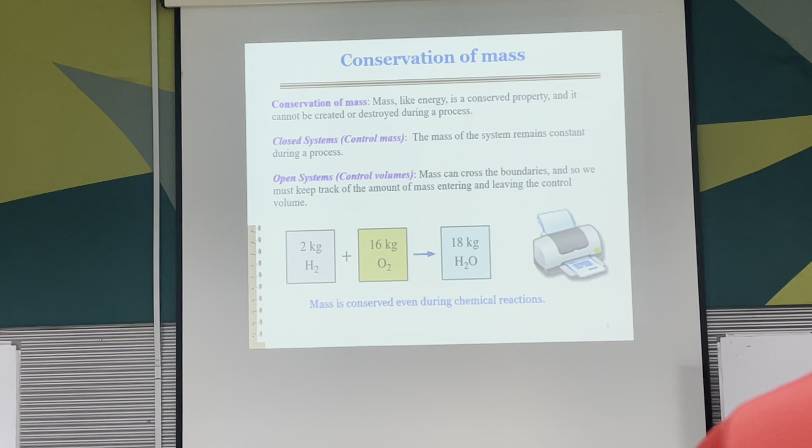And yeah, so in open system, conservation of mass is a theory that is very important for us. But in general, of course, that's just what we assume most of the time lah. Okay, so in both cases, closed system, open system, for us, we just assume the mass is always constant. Okay, so we talk about conservation of mass. So we are talking about mass flow rate in equals mass flow rate out. So we always assume steady flow, and then we can use this concept for open system.

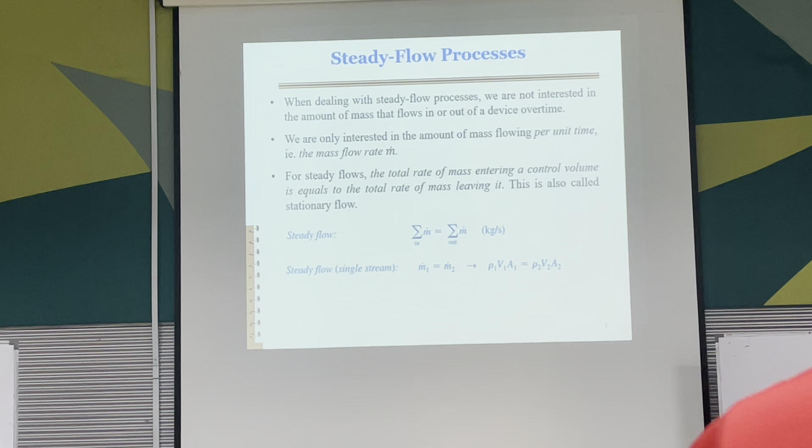Okay, so yeah, steady flow. As I mentioned, we use the assumption of steady flow in order for us to be able to assume conservation of mass flow rate. So this is one main assumption that you must have for all open systems. Okay, and then this is just how we calculate mass flow rate from volume flow rate, and also how we calculate volumetric flow rate. So volumetric flow rate is just the velocity, so this V here is velocity, multiplied by area,

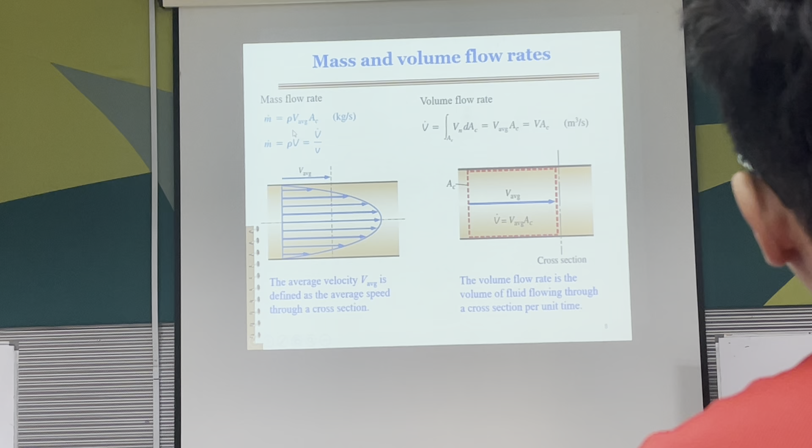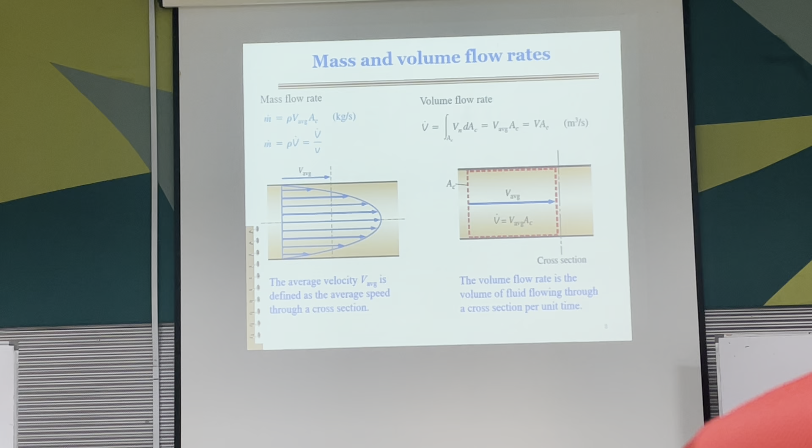and then mass flow rate is simply either density multiplied by volume flow rate or volume flow rate divided by specific volume. So again, these are the things that must be intuitive to you lah. The moment you see this, you must know how to do all this. Okay, so I think we did look at this example where it's just a calculation of mass flow rate, so nothing special here.

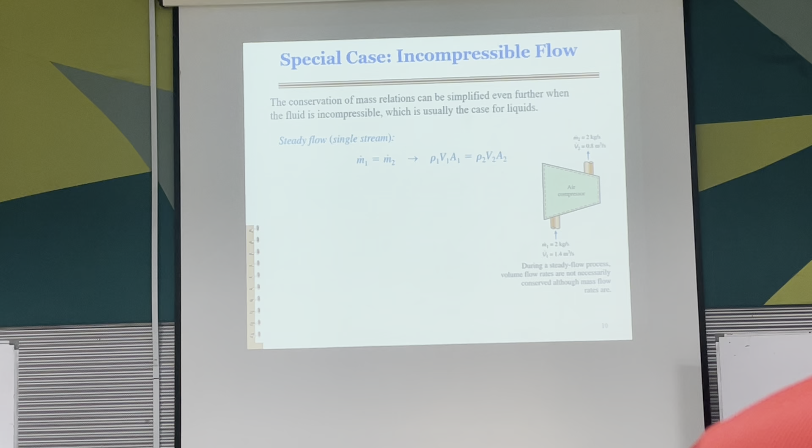And then we talk about this special case of incompressible flow. So incompressible flow means that the fluid in play here, whether it's liquid or gas, has a constant density. So the density or specific volume doesn't change. So in this kind of case, you can assume that the volume flow rate in is equal to volume flow rate out, because the density is a constant. But always remember that we don't have such a thing as conservation of volume. It is always conservation of mass. So in all cases, just assume mass flow rate is constant.

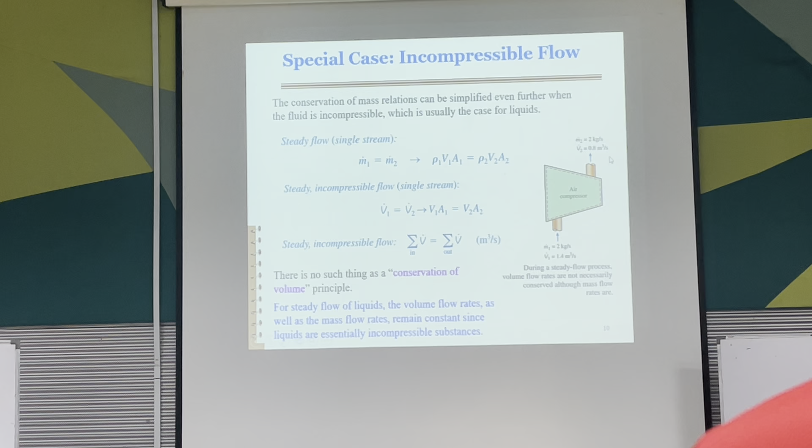Okay, I mean, if you're not very good at differentiating the situation, then you just cancel off accordingly. But again, mass flow rate is always constant, not volume flow rate, because the density can change. So you can see in this example as well. It's just a simple illustration, but you can see that the mass flow rate in and out are both 2 kg per second, but the volume flow rate can change. So the variables that can change here would be velocity, area, or density. So these are the things that might change.

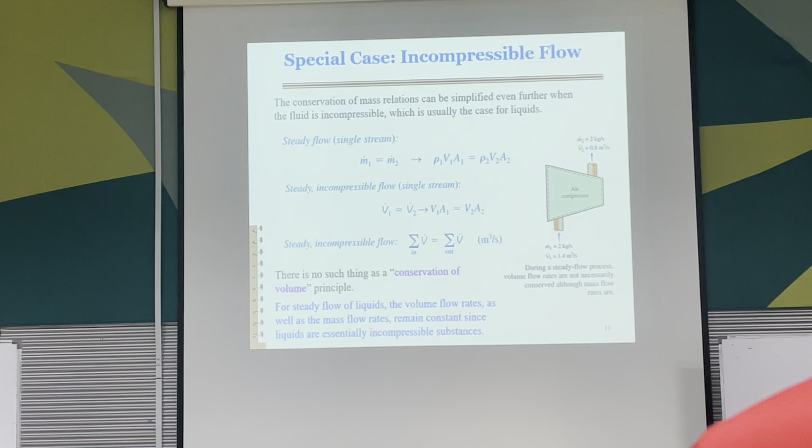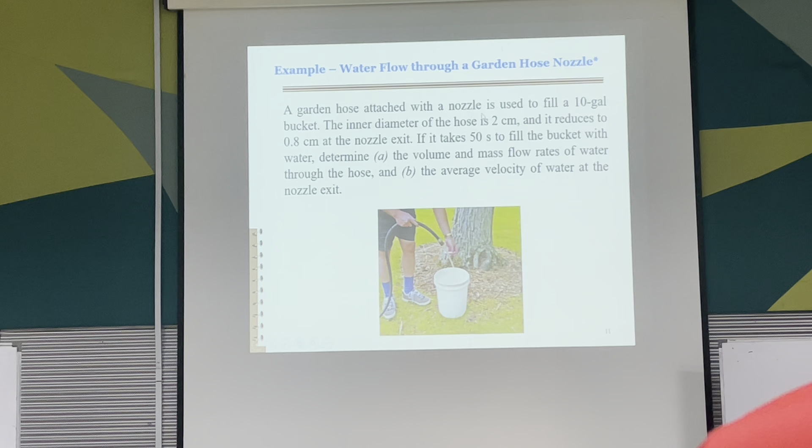Okay, then we do have one example here. A garden hose attached with a nozzle is used to fill a 10-gallon bucket. The inner diameter of the hose is 2 cm, and it reduces to 0.8 cm at the nozzle exit. So the normal hose that you use at home is an example of a nozzle as well, if you have the attachment at the exit. If it takes 50 seconds to fill the bucket with water, determine the volume and mass flow rate of water through the hose and the average velocity of water at the nozzle exit.

So try this out based on what you have just learned. This will be about the conservation of mass, so mass flow rate. Just a quick one. It shouldn't take too much time.

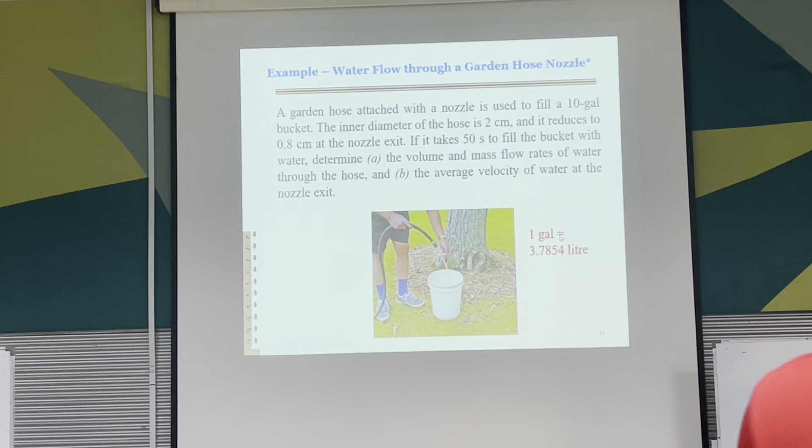You can use this conversion for gallon, and in this case, when you're dealing with liquid water, we can more or less assume that the density is constant.

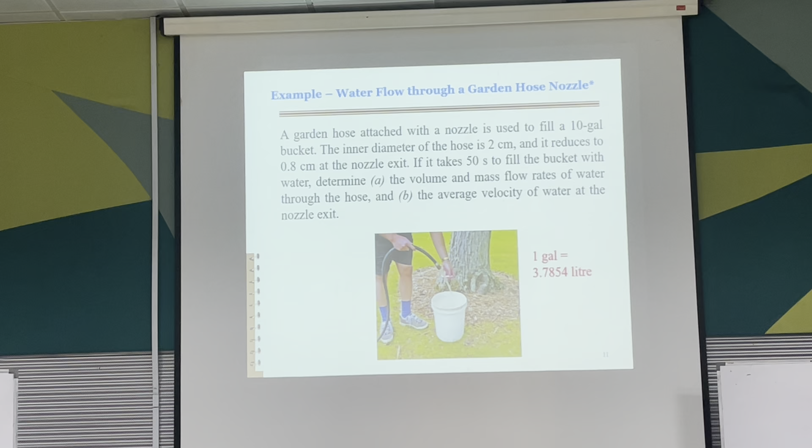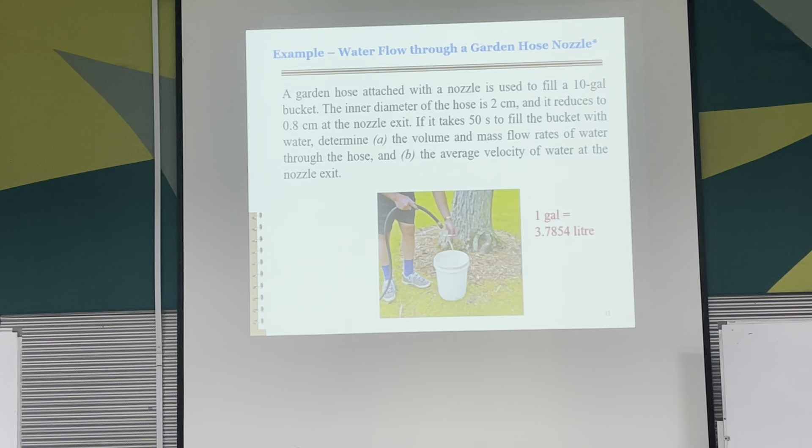Okay, I think I'll just show the answer for this one. So again, let's just look at the question. You are told that the inner diameter is 2 cm and the exit would be 0.8 cm. So that's what you have lah. If you have a nozzle, then this will be the 2 cm part, and this will be the 0.8 cm diameter. And you have the total time to fill the bucket. Essentially, that's all you have.

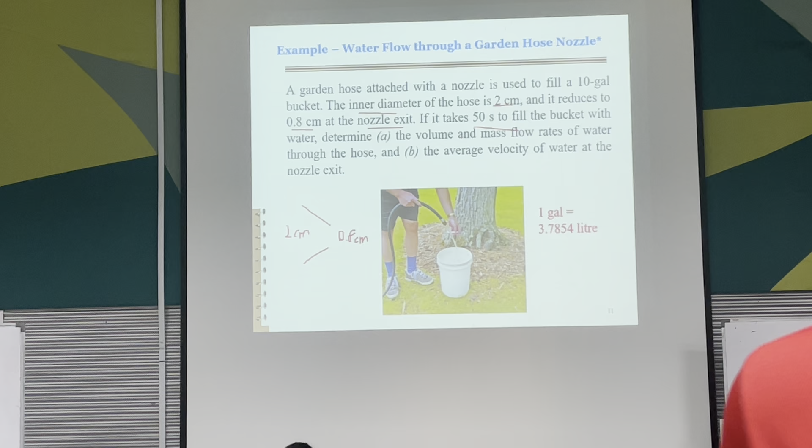But of course, like I said, if we are dealing with liquid water, we can mostly assume that this is an incompressible flow, because if you just look at the thermodynamic properties table, for water, on the saturated liquid side, you can see that the specific volume doesn't really change much. They're all quite consistent values. So when you're dealing with liquid, mostly you can just assume that they are incompressible. We're talking about pure liquid here. Once it gets past the saturated state, then that's a different story.

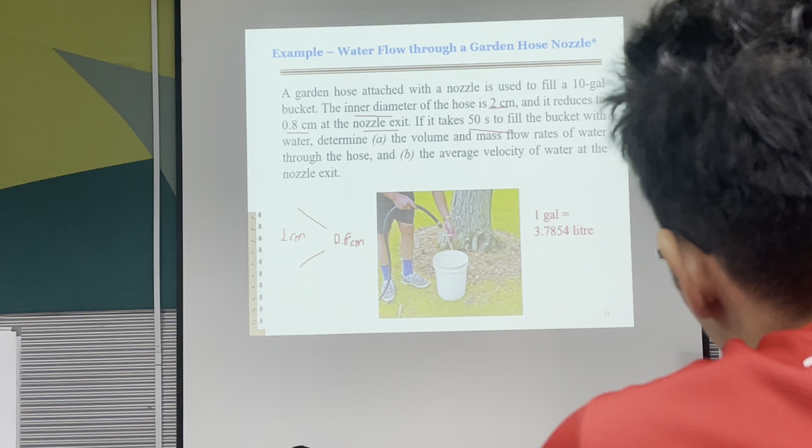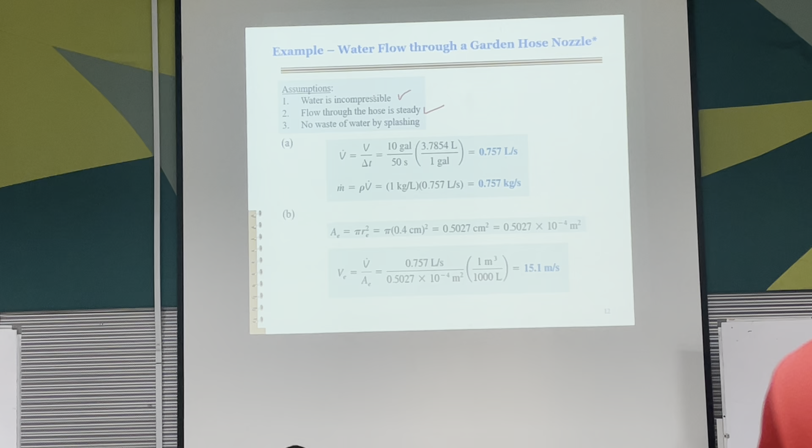Okay, so here we can make this assumption. So as I mentioned, we can assume that water is incompressible. And then again, for open system, you should always assume steady flow. And the last one, don't care lah. Meaning I won't expect you to write this for the exam, let's say if this comes out. So the first two will be the important assumptions for this case.

So once you know that it is incompressible, then we know that density or specific volume doesn't change. So volume flow rate in and volume flow rate out is the same. Then you can find out the volume flow rate, because in total you have 10 gallons of water and they flow through in 50 seconds. So from here you can calculate the volume flow rate.

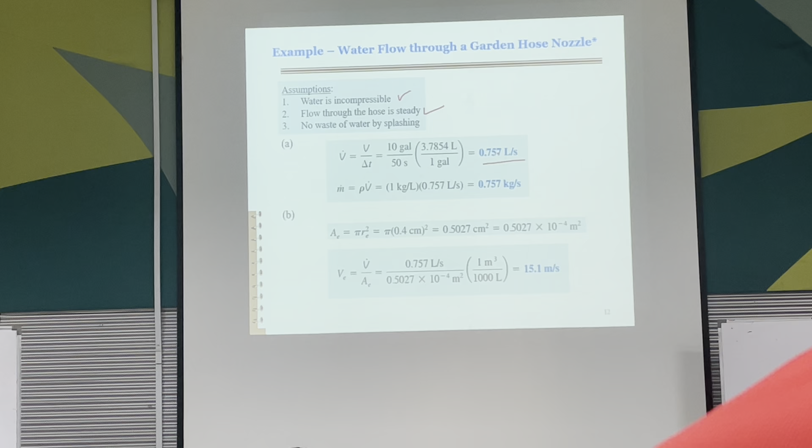So of course, if you want to convert this to meter cube, that's fine as well. In this case, we don't really convert because it doesn't really matter. Question doesn't really ask. So in general, if the question doesn't ask for any specific unit, you can leave them in any form lah, as long as the answer is correct, of course. So then we know that every liter of water will be 1 kg. So from here, you can also find out the mass flow rate, which is actually the same value.

Okay, so what does B ask for? The average velocity of water at the nozzle exit. So here we focus at the exit. So again, we know that the exit has the same flow rate, right? Because density doesn't change. So all you need to do is to calculate the exit area.

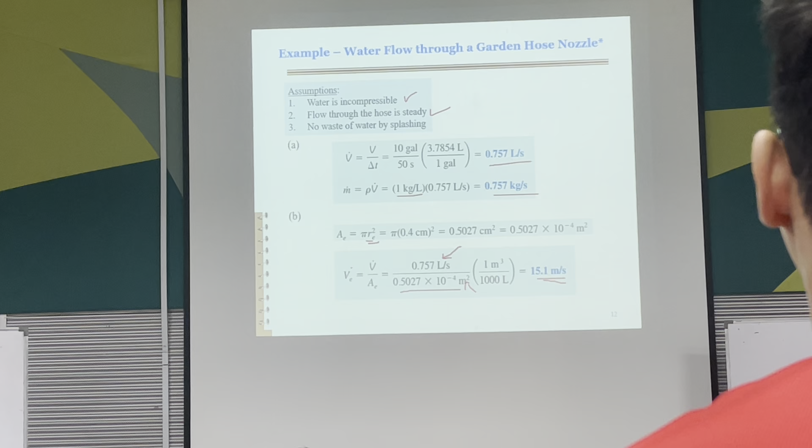So once you calculate the exit area, in this case you have to change the units, because this will be in terms of meter square. So you have to change the liter to meter cube, and you will be able to get the velocity at the exit just based on this. So just simple calculation here. Okay, so shouldn't be too tough here.

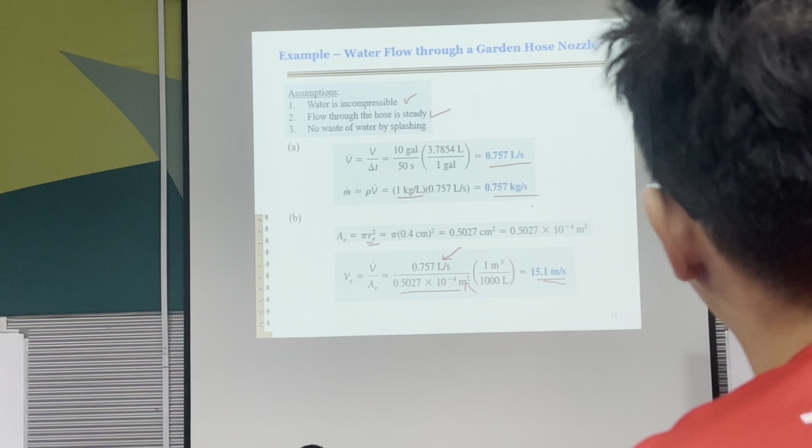Anyone needs me to stay at this slide for a while more, or I'll just progress. Okay, 3, 2, 1, then let's move on.

Okay, so now, once we pass that, here we will have to look at proper energy analysis for open system now. So when we were dealing with closed system, you should be able to notice that the energy that we deal with is mainly the internal energy, right? So that's why we have our default equation, Q minus W equals to delta U. So whatever happens causes changes in the internal energy of the system. That was what we learned in closed system.

But in open system, that is no longer the case. The main reason here is that in open system, we now have what we call the flow energy, because we have a constant flow of fluid. So in a way, this is a component of the mass flow. I mean, it's not exactly that, but this is the energy that is moving. So flow energy is basically the work required to push the mass into or out of the control volume. This work is necessary for maintaining a continuous flow through a control volume. So basically, it's the work in order to carry the fluid, to move it. That's what flow energy is.

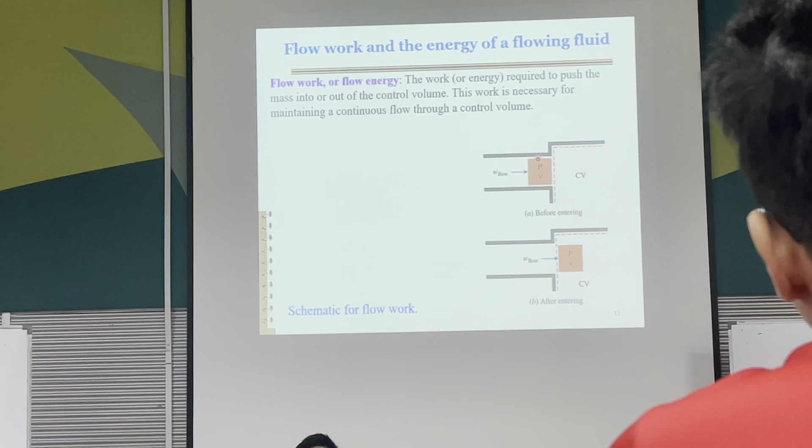Okay, so here we try to define this flow energy in terms of the normal work that you study, meaning force over distance. Alright, so remember that we said that for open system, we need to define a space that we are studying that we call control volume. So you imagine this is the control volume. And you imagine that you are just carrying one specific amount of the fluid. So the flow energy will be the energy that you need to push this amount into the control volume, and then later on out of the control volume. So this will be the mass flow crossing the system boundary, and this is the system boundary.

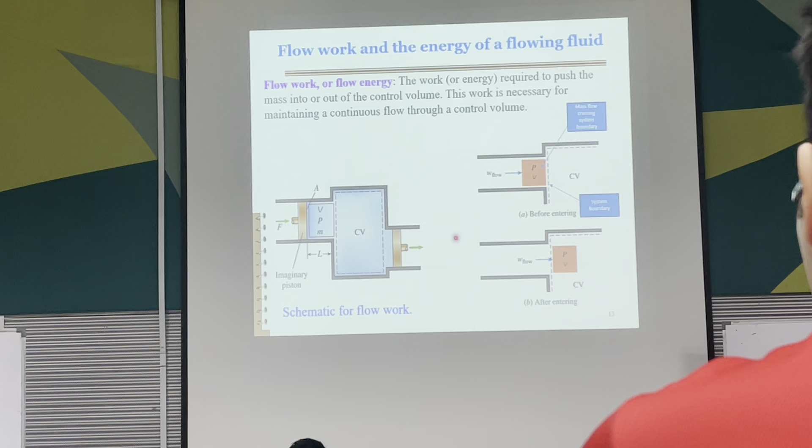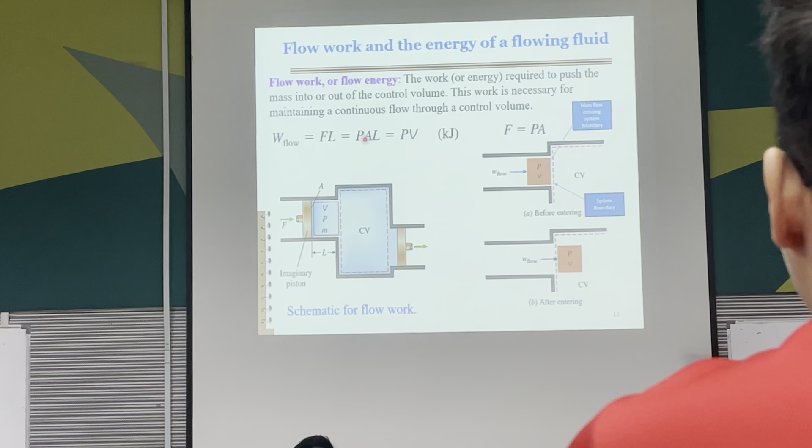Alright, so in other words, you can also imagine this as a closed system. So you have a piston here, you also have a piston here. So you push this piston, and then this piston will push the fluid through the control volume, and then when it goes out of the control volume, this piston will get pushed off. So from here, the flow work or flow energy is simply the force multiplied by the distance. So this is the force, this is the distance that it moves, and force is pressure multiplied by area. So we get the equation PV, pressure and volume.

So actually, if you imagine this as a closed system, right? Let's say if your boundary is around this whole thing, can you see that this is similar to one thing that you learned in closed system?

It actually is kind of like boundary work. But now it's an open system, so it's no longer boundary work, because in this case our boundary is actually fixed. But this is actually similar to boundary work. In boundary work we also defined that the boundary work is PV, right? It's just that it is in a slightly different sense now. So in this case, the pressure itself is the one that changes because the flow is moving. Okay, so this is the flow energy.

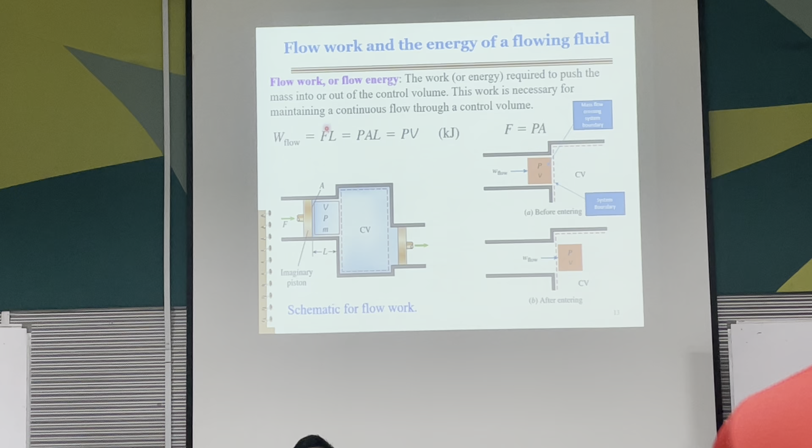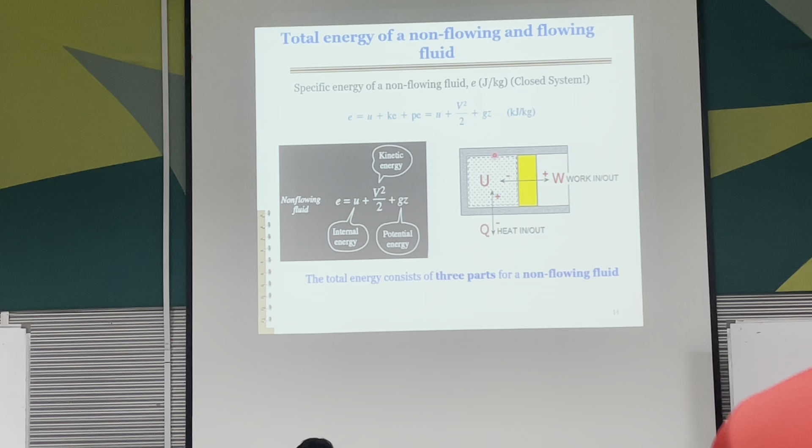So now when we look at the energy equation, we used to say U plus KE plus PE, right? The total energy of a non-flowing fluid, meaning our closed system. This was the energy change of the system. Just a revision: we have internal energy, kinetic energy, and potential energy. This was for closed system. For flowing fluid, meaning for open system, we are adding one more term, which is PV. The energy by the pressure, because without pressure there's no flowing fluid. So we are adding one term here.

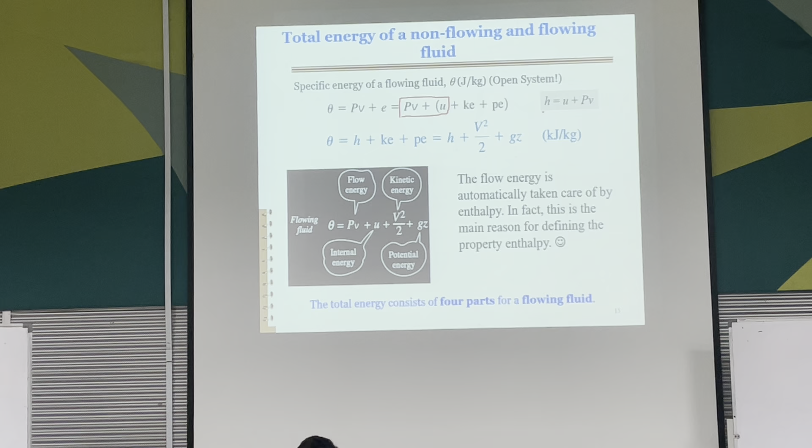Remember with the closed system, if we have a constant pressure process, of course here it's slightly different in meaning, we can combine these two terms, right? For open system, we combine it directly. So in essence, U plus PV becomes H. This is the energy change of the system for open system. The flow energy is automatically taken care of by enthalpy. We don't care about the PV anymore, because now enthalpy takes this into consideration. In fact, this is the main reason for defining the property enthalpy.

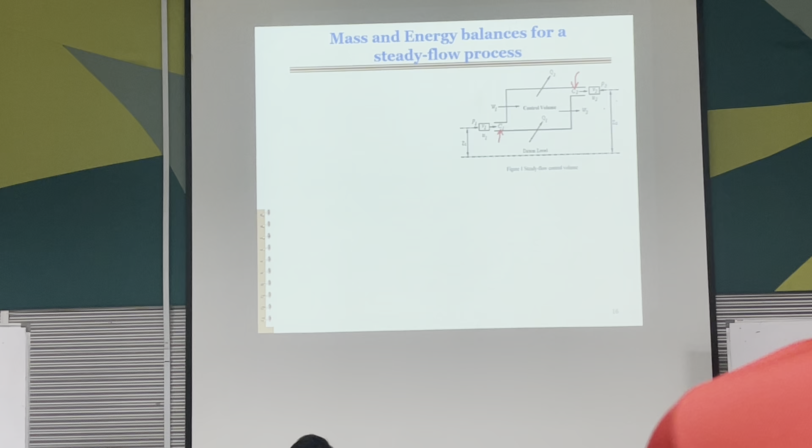So for flowing fluid, technically the total energy consists of 4 parts, but we simplify the PV term and the U term into enthalpy. This is the new equation for open system. Let's have a quick look at a system where everything changes. This can be a bit confusing because we have a limited alphabet. This C here is actually velocity. This C is also velocity. Sometimes we use C as velocity. In this case, we have change in height. We also have change in velocity.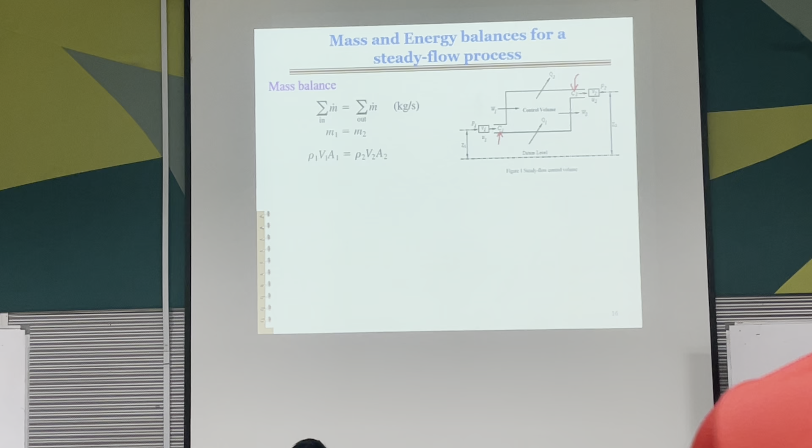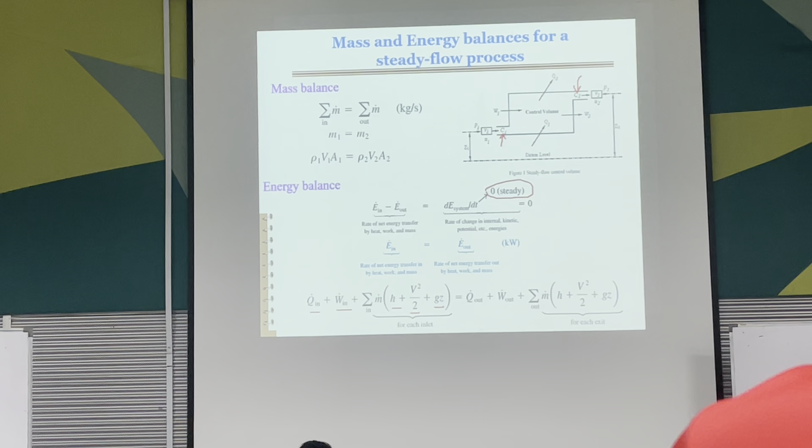For open system, for the mass balance, we assume steady flow, so mass flow rate is constant, and we only have one mass flow rate. For the energy balance, in general we assume the change in the energy of the system is 0, because what comes in equals what goes out. So E in equals E out. E in will be Q in, work in, and the energy terms: enthalpy, kinetic energy, gravitational potential energy, which equals the out terms, with V2, same thing.

Remember in tutorial I mentioned that sometimes it's just a matter of perspective. What we are doing is exactly the same. If you move all the Q to the left and all the work to the right, ultimately what you get is this: equals delta H, plus the KE term, plus the PE term. Sorry, no tablet, so this is how I can write.

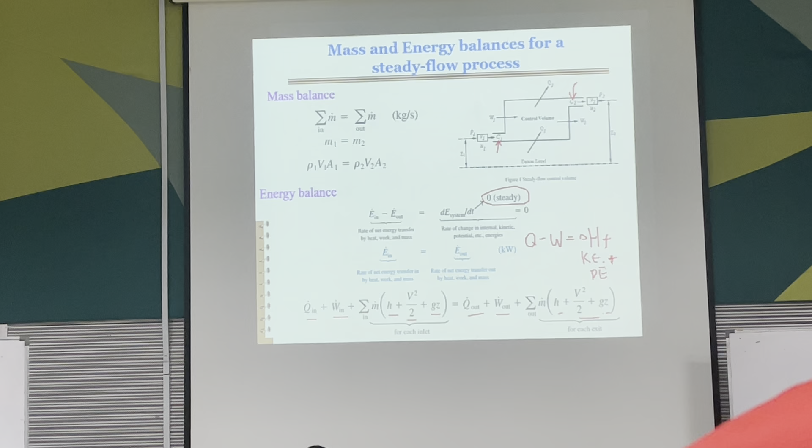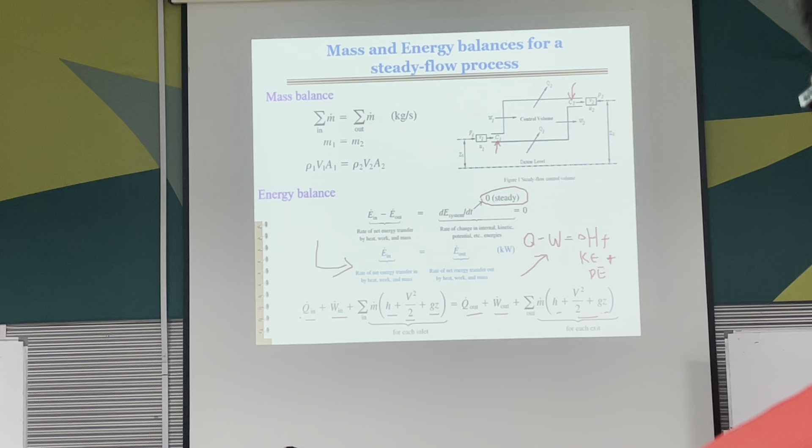Can you see that? Technically, if you just rearrange, you still get the same equation as the closed system. But for open system, instead of delta U, it is purely delta H. One way to remember: these two have the same equation. If you are a closed system, you are dealing with change in internal energy. If you have an open system, you are dealing with enthalpy. That's the basic idea. In theory we usually put it this way. Every time we see an open system, you write this whole equation out, then cancel off terms one by one depending on what is available.

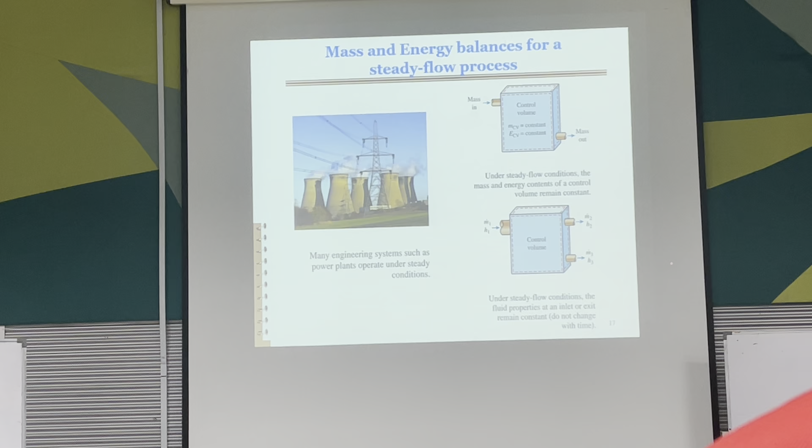Here this is just to show you the steady flow assumption. Under steady flow condition, the mass and energy content of a control volume remain constant, and the fluid properties at an inlet or exit remain constant. So with steady flow, mass flow doesn't change, and the properties or states of the inlet and outlet remain constant. They won't change over time, so we can safely find their respective properties through our analysis.

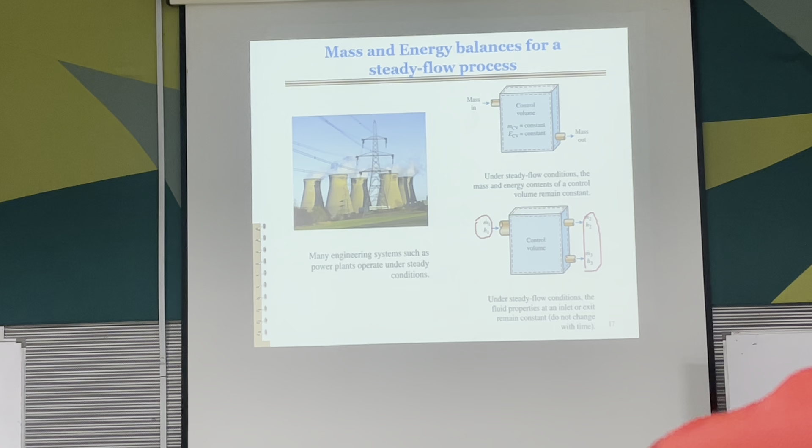So again, this is an important assumption for all open systems. Okay, so here's an example. Now that we look at an open system, I'll just discuss this. So air flows steadily in a pipe at 300 kilopascal and 77 degrees Celsius and 25 meters per second at a rate of 18 kilogram per minute.

So you are given the pressure, temperature, and this is air. So again, go back to closed system when we talk about the steps of analyzing this kind of question. So first thing, you need to identify if this is an open or closed system. Obviously we are in the open system chapter, so this is an open system. By exam, you need to identify. Second, you need to identify what is the substance that you're dealing with. So here we are dealing with air.

So air flows steadily in a pipe. You are given these properties. So next you look at what properties are given to you. You have the velocity and the mass flow rate as well. Determine the diameter of the pipe, the rate of flow energy, the rate of energy transfer by mass, and also the error involved in part C if the kinetic energy is neglected.

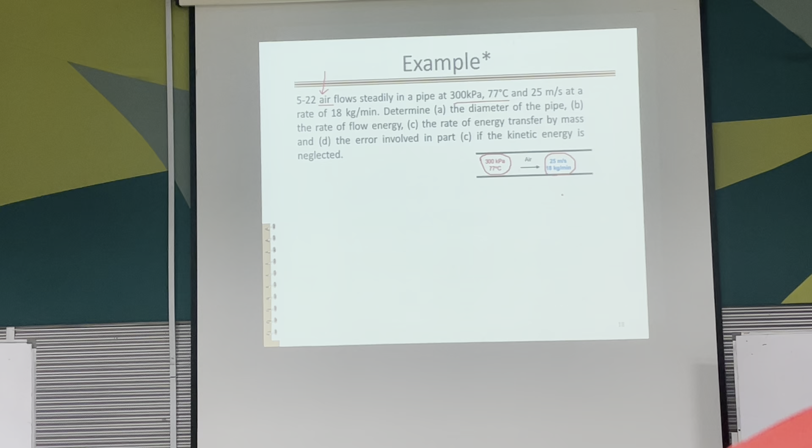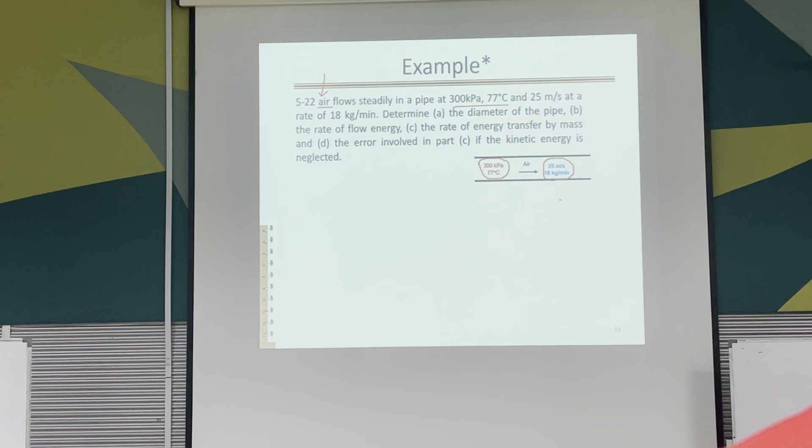Okay, so this question is actually what we use to prove a certain thing, which I will tell you later. Actually part C basically. Sorry, part D. Okay, so how do we determine the diameter of the pipe from the information given here? The equation should be pretty straightforward here.

Think about it, how do we get the diameter? Or rather, instead of telling me how to find the diameter, what are the properties here that can be related to diameter? You only have 4 pieces of information here, right? The main one that can be related to diameter will be... no, wait, based on here. You can just say all of them, right? The one that's directly related to diameter would be this one, right? Because you have mass flow rate and velocity here.

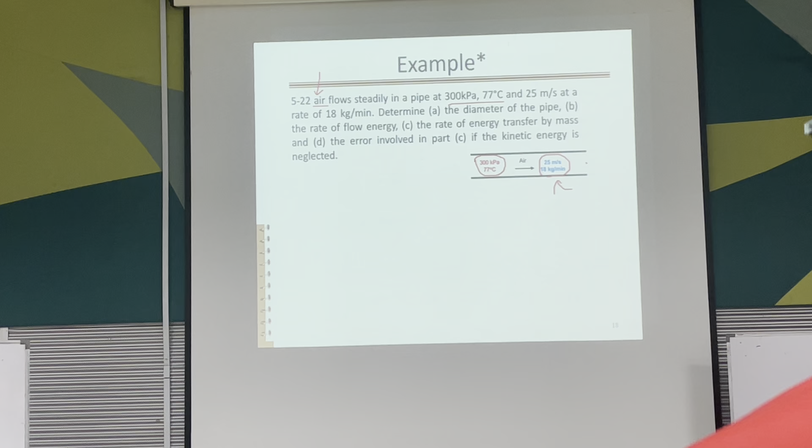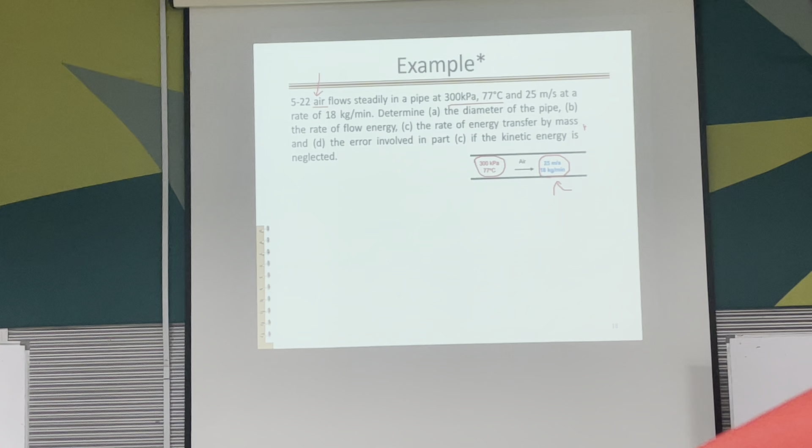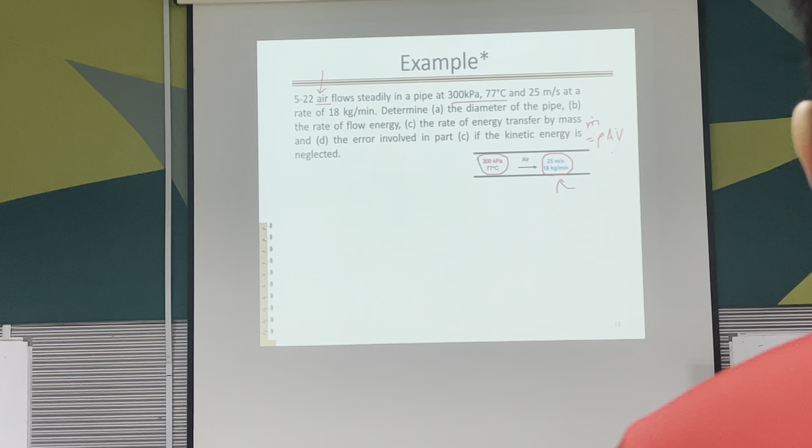So what's the equation for mass flow rate? Okay, so if you look at this, you have mass flow rate, right? What is the equation for mass flow rate? It will be rho A V. So V term, you have the answer. You need to find A for you to find the diameter. So meaning what you need to find here is density. So how can you find density of air? Yes. There's no table for you to find density of air. Water, yes, not air.

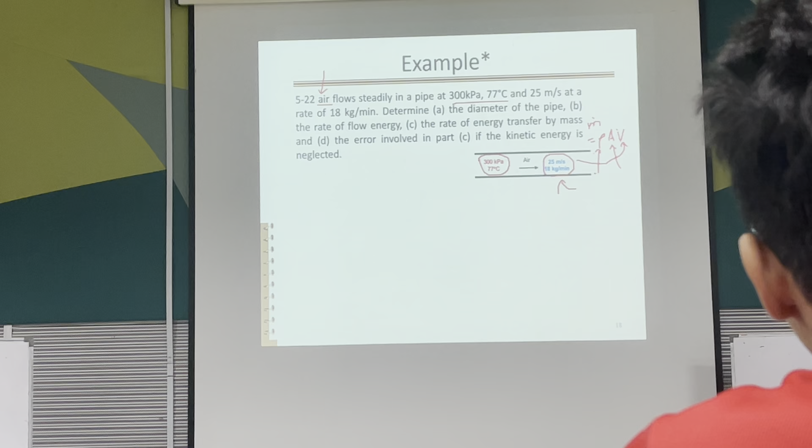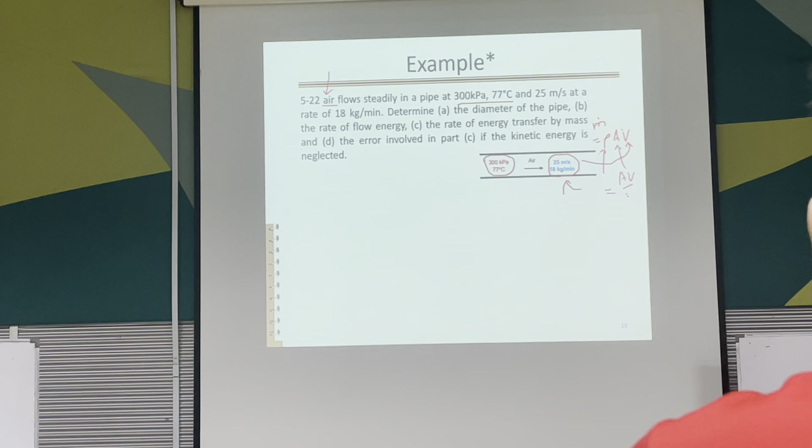Or if you write it in specific volume terms, then it will be A V over the small v. So whichever one, you need a density or specific volume. But what equation will give you this value? So actually, in general, this is how you can solve most questions as well. Try to look for what you need, through all the linkages.

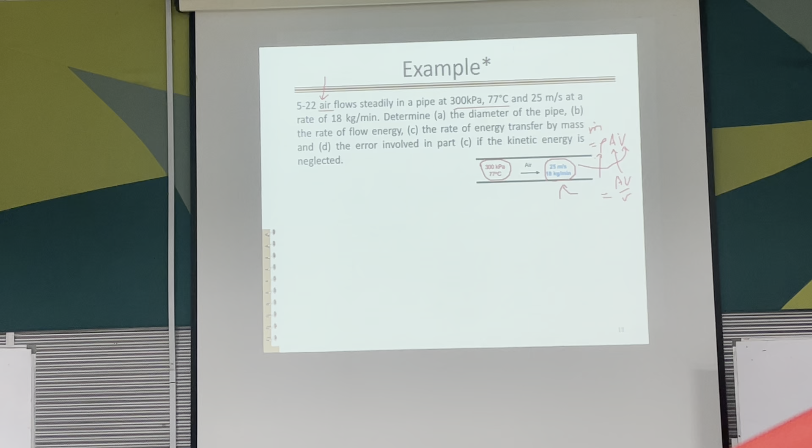So like I said, this is my set of answers. If you look at answers, usually this is not how they go, because the answers know what they want. They will just find what they want right from the start. This is just me showing you how you can identify what you need to find. So based on this equation, you know that you need density or specific volume. So always bear in mind one thing. I actually mentioned it in the previous classes as well. When you're dealing with air, we are assuming that it is an ideal gas, right? And if it is an ideal gas, what can you use?

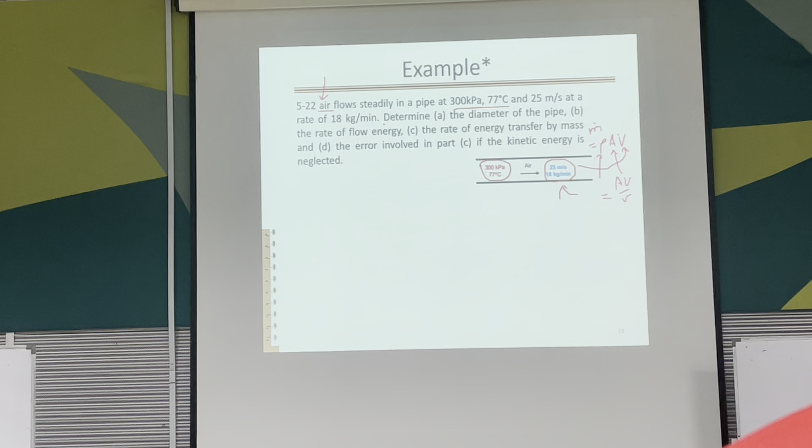Ideal gas equation. Okay, so for the ideal gas equation, these properties you can get from the table. This is at 350 Kelvin. So for ideal gas, you can use the ideal gas equation, PV equals mRT. If you move this m over, the equation becomes the specific volume equation, so this is a small v. And you move P over, so you can use this equation to calculate the specific volume of the air. Then now you get the specific volume of the air, you can calculate the area and subsequently the diameter of the pipe.

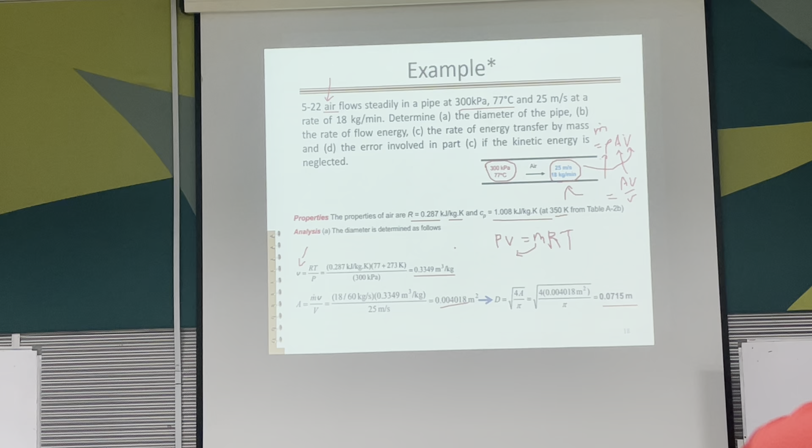Okay, so again, if you see air, you see temperature and pressure given, there's a high chance that you can make use of the ideal gas equation. Just don't use this for water, that's all. I mean it's not to say air only, but it's for ideal gas. Is everyone clear about part A?

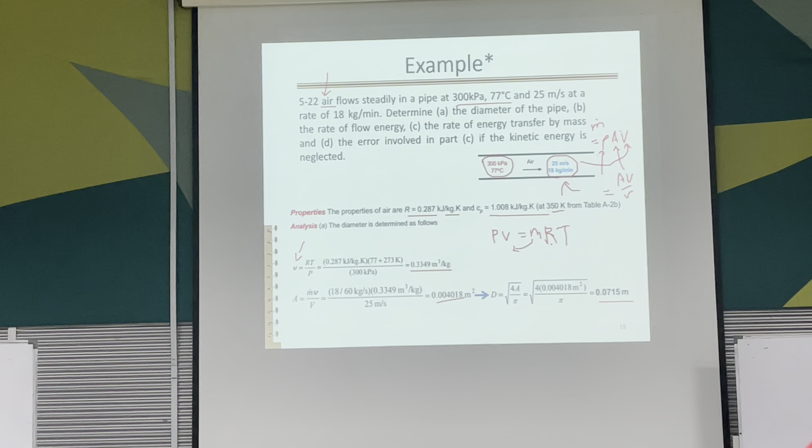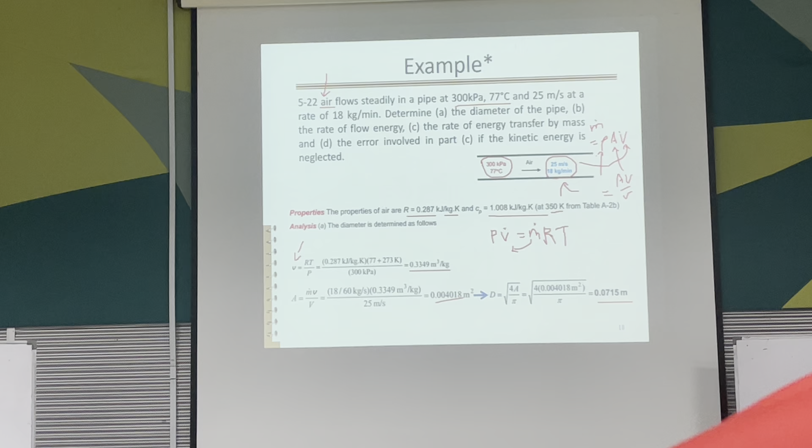So technically speaking, you can also use it the other way round, meaning you can actually sub in the mass flow rate term here, and then the volume flow rate. Then you will get a volume flow rate. Then you can use the volume flow rate and the velocity to get the area. Basically, it's still the same thing. Okay.

Alright, so now we look at part B. Once you solve A, then B should be more straightforward, because in B you are just looking for rate of flow energy. So for B, you can directly apply the equation. For flow energy, remember we said it was PV, but that was the capital V. So now we only have the small v, you multiply by the mass flow rate, and you should be able to get the answer.

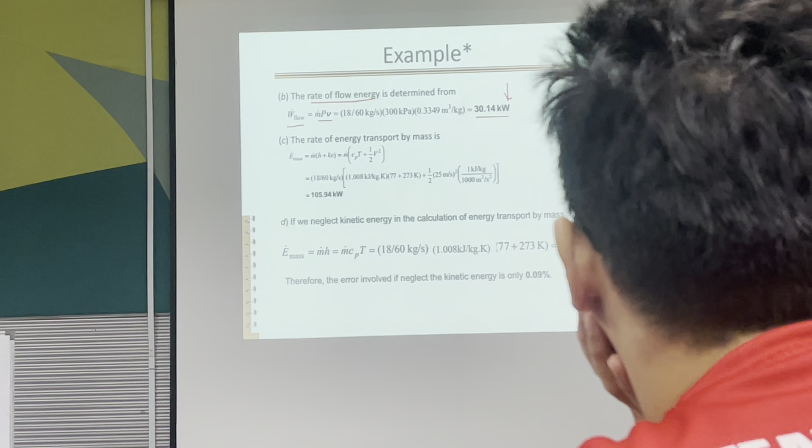The question asks for rate of flow energy, so obviously it is going to be in terms of kilowatt. So again, always remember this: when we are calculating all these energy terms, unless it is specified that you're looking for specific energy or energy per unit mass, we always want it in terms of either watts or joule. We don't want the answer to be in terms of per kg. Okay, so for B, we are only looking for rate of flow energy.

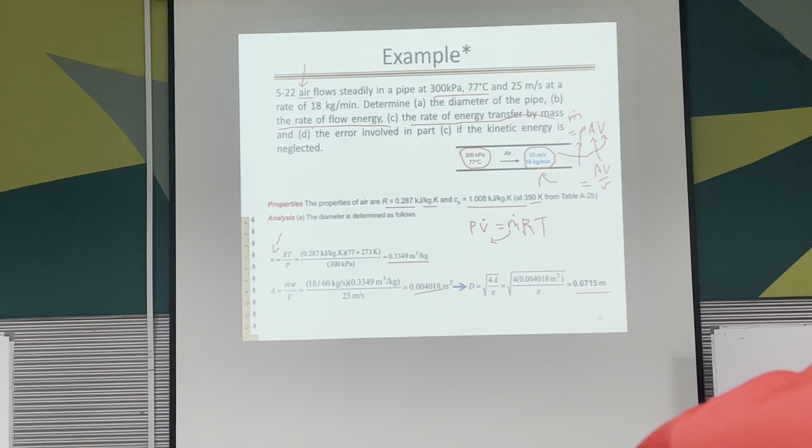So in C, we want the rate of energy transfer by mass, meaning we want the entire energy transfer, not just the flow energy. So the entire energy transfer in this case is simply H plus KE. You apply the open system equation from just now. In this case, of course, we don't have Q, we don't have W. We also do not have gravitational potential energy. So what you are left with is just H and KE.

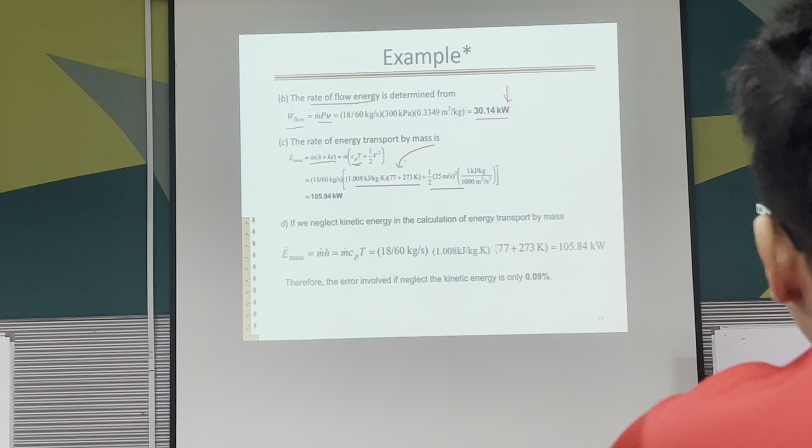So in this case, the H is simply CpT, because again, we are talking about air here. CpT is for enthalpy, CvT is for internal energy. So you can use CpT plus the KE term, but again, don't forget about the units. So what do I mean by the unit? When you use CpT here, the value that you get will usually be in terms of kilojoule. But when you use V squared over 2, this is usually in terms of joule. So that's why we need to divide by 1000.

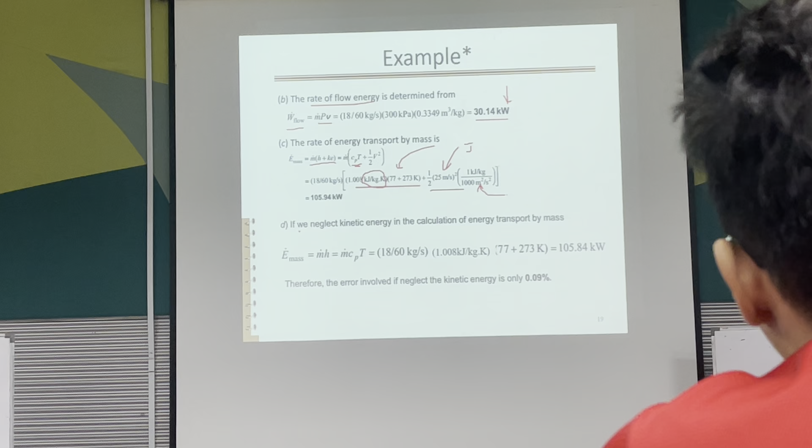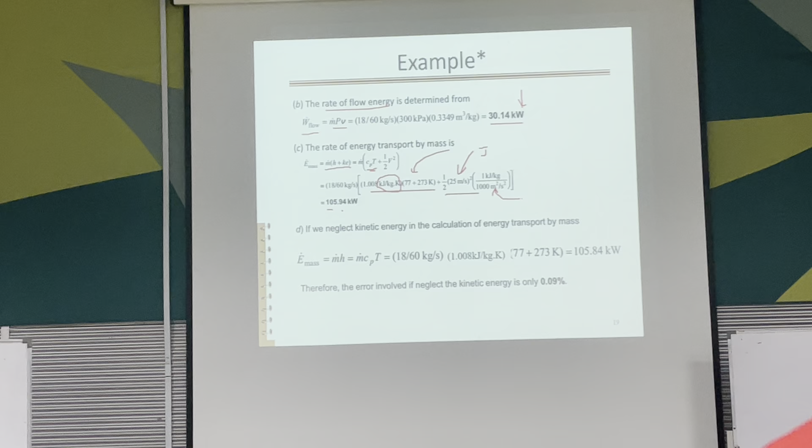Okay, so D asks us to calculate this value again if we are assuming that there's no kinetic energy. So this one is actually the same calculation, but you just take out the kinetic energy term. Once you take out the kinetic energy term, you can see that this value is not very significant. With kinetic energy it is 105.94, without kinetic energy it is actually 105.84.

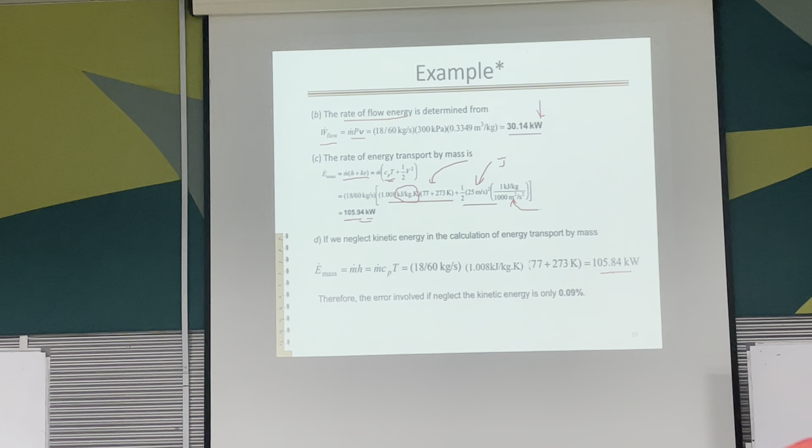So you will often see this in our application here in open systems. Even though it makes sense that in an open system there is a flow, there will be some velocity change, so KE definitely will change, a lot of the time we will just ignore this term because the value is not significant at all. Of course, if the question tells you that there is a change in velocity, this is a velocity, this is a velocity, then you take that into consideration. But most of the time, you will see that we actually ignore them.

Your explanation is correct, but I prefer a bit more. Atas a bit, I don't know. Yeah, not really atas, but use the term that you used here basically.

Yeah, so the answer is no, because if you turn this on, the amount of drinks inside will actually reduce. So meaning mass is actually not conserved. So again, same as what your friend explained here, if you have another inlet that keeps refilling it while you are taking the drinks, then yes, this can be considered a steady flow system. Otherwise, this is not.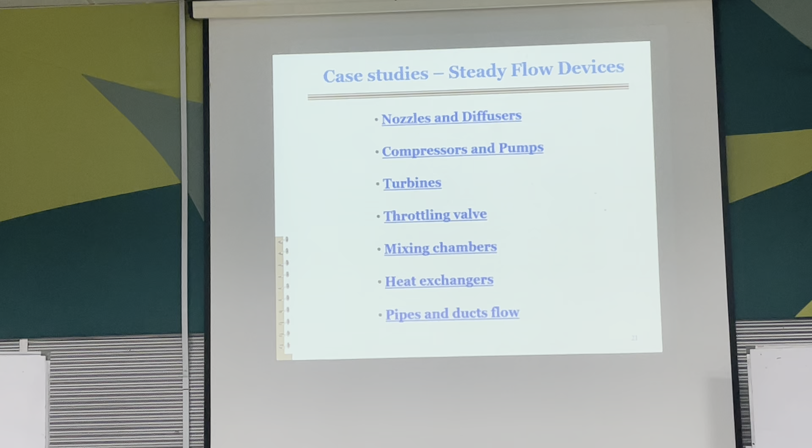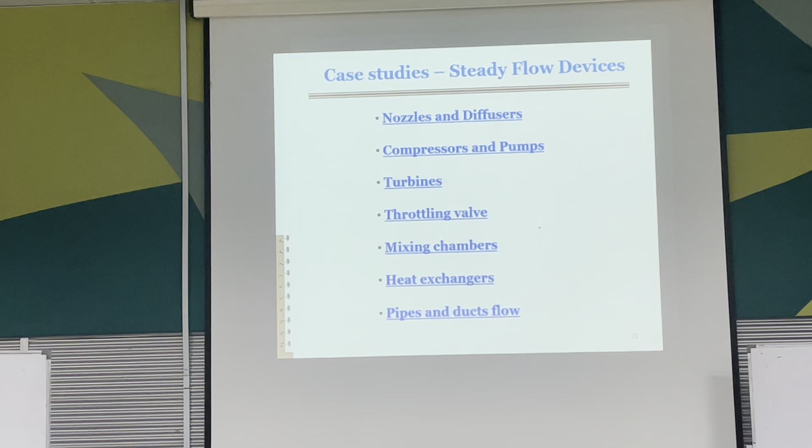Alright, so for open system, okay, never mind. I think we'll take a 5 minute break first. After the break, we will look at 1, 2, 3, 4, 5, 6, 7 different types of steady flow devices and how we can analyze them. Technically speaking, the main ones are just 5 or 6. The main one is the 6. The last one is actually just a random example in a sense. So after the break, you come back at like 8:55 or 9, then we will look at all these different examples or cases.